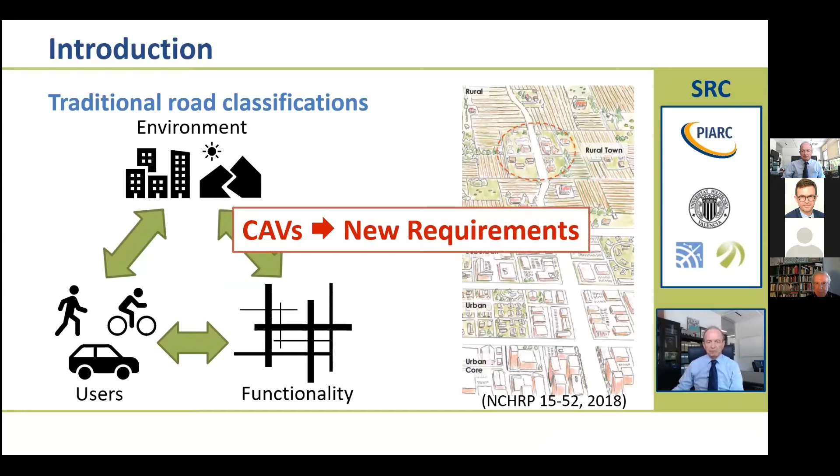However, none of the classifications proposed before 2020 took into account the incipient advent of autonomous and connected vehicles, which will of course require the definition of new criteria to classify our roads. The project, entitled Connected Roadway Classification System, developed in 2020 by the TTI at Texas A&M University in the United States, developed a new framework for a road classification system that includes the characteristics of autonomous and connected vehicles.

This road classification system establishes 4 road categories or levels, from a level 1 in red, associated with a road design or maintenance that does not meet current criteria, to level 4 in green, which is related to a design that supports the operation of most autonomous and connected vehicles and communicates with vehicles. It is noteworthy that they set a time horizon of 10 years to reach the maximum level.

To assess the level of automation enabled by a road, 3 domains were considered. First of all, talking or communication, associated with connectivity between vehicles and infrastructure; seeing or perception, associated with the recognition of road markings and signs by autonomous and connected vehicles; and finally, simplifying, associated with the degree to which mainly the geometric design and pavement conditions facilitate the operation of these vehicles.

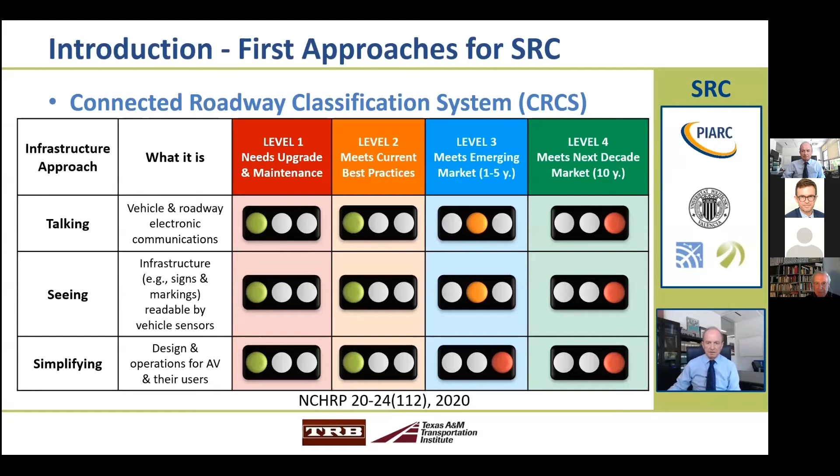However, some issues included in the classification are still unknown, as it is shown by traffic lights. Further research is needed to establish more clearly some of the criteria on which this classification is based. The main goal of the InfraMix project, funded by the European program H2020, was to prepare the road infrastructure to accommodate the introduction of connected autonomous vehicles from the perspective of connectivity.

Thus, depending on the compliance of the different characteristics shown in this table, a total of 5 categories of roads or ISAD levels were defined based on the infrastructure support levels for automated driving. As you can see on the right, different levels are assigned to road sections or elements, not to a whole road. Thus, level E is the lowest level, and it represents a conventional infrastructure which does not offer any support

for connected vehicles. At present, there would be many sections with a level D, consisting of a support of digital maps with static information of signs. Level C would complement the previous one by adding variable information such as incident warning, meteorology, among others.

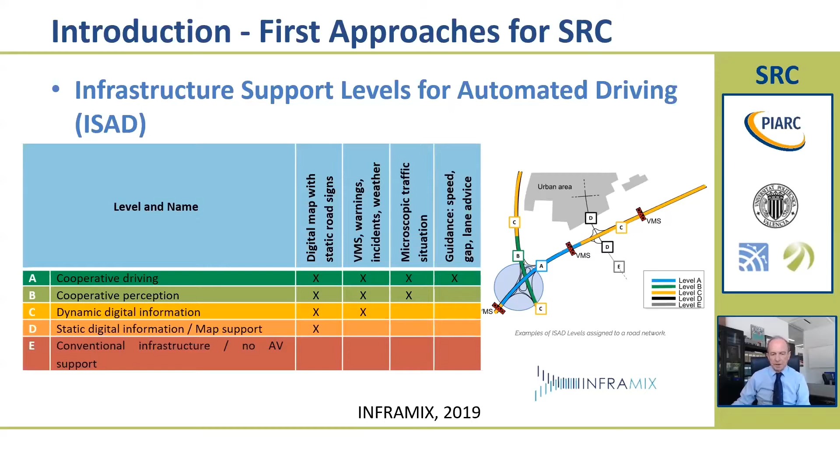In level B, the infrastructure is also able to exchange microscopic traffic and road condition information with vehicles in what is called cooperative perception. Finally, level A will allow cooperative driving to improve road safety and operation.

As a summary of the classification systems, we can say that all the previous ones did not contemplate logically the new vehicles. The new USA proposal did not contemplate the diverse users and did not include many of the factors involved in the new phenomenon without considering possible thresholds.

The ISAD proposal focused exclusively on connectivity and the necessary digital infrastructure to support it, but it did not go into the characteristics of the physical infrastructure nor into the diversity and limitations of automation. Additionally, none of the previous systems integrate dynamic road conditions. Definitely, the proposed road classification systems integrating connected autonomous vehicle characteristics are based on diverse approaches and harmonization is needed.

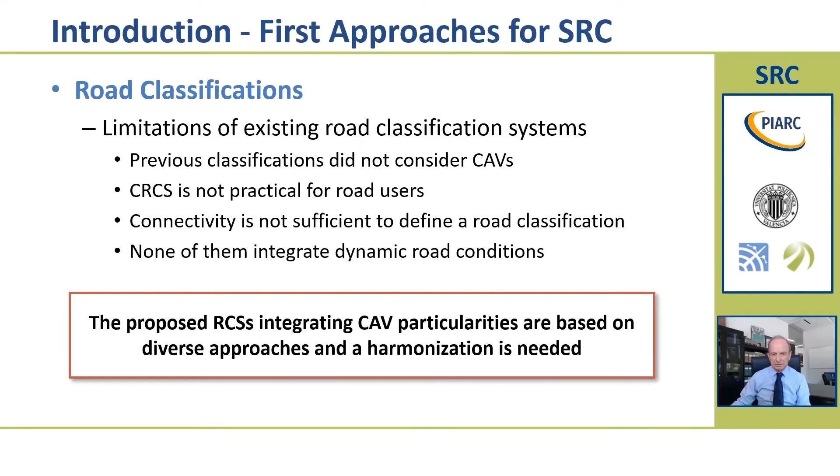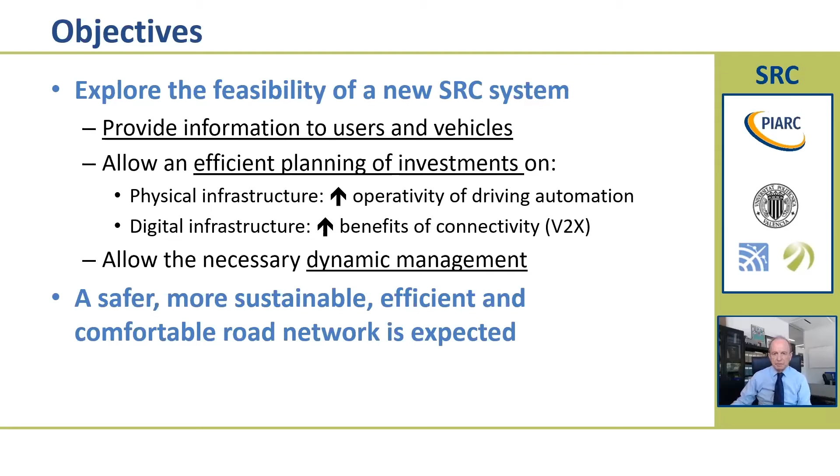The main objective of this special project is to explore the feasibility of a new smart roads classification system that could provide information to users and vehicles about the smart road level, being the base for efficient road planning of investment on physical infrastructure and digital infrastructure to improve the operativity of automated driving and the benefits of connectivity. Finally, allow the necessary dynamic management considering diverse variable factors. A safer, more sustainable, efficient, and comfortable road network is expected.

Other objectives are related to design and propose a framework that can evolve and be detailed in the future, taking into account the new and improved technology, the research findings, and the best practices of its application. Additionally, the new system should be based on the different automation levels, the necessary connectivity, the current road network characteristics and classification, and the diverse users.

Some specific objectives have been proposed for the smart road classification. There should be a common language to facilitate all stakeholder communication, useful to facilitate the application by road administrations and operators for planning, investment, and management, standardized to be included in a normative framework, interoperable to facilitate data exchange, robust to assign an adequate and coherent smart level, consistent and simple to facilitate messages for users, and it should be integral, dynamic, and flexible to facilitate evolution and transition. Finally, the new system should not mean liability for road administrations and road operators.

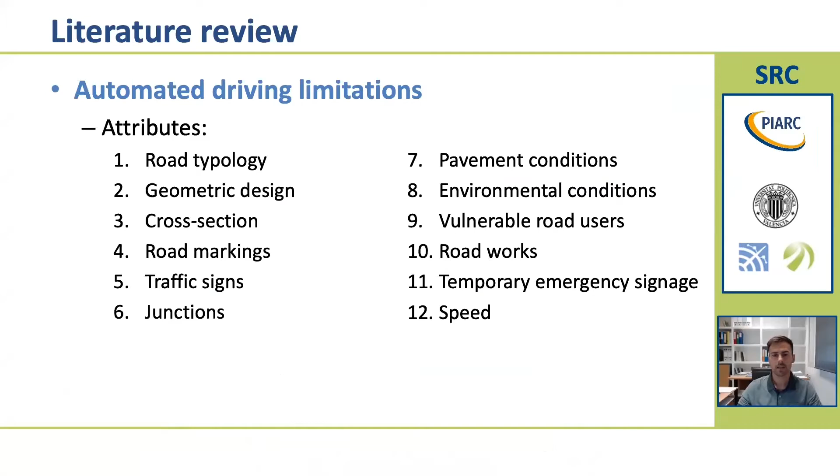Hello, my name is David Llopis, and I am an assistant professor at the Universitat Politècnica de València. In this presentation, Jose Montserrat, who is a professor at the UPV, and I are going to present the most important aspects regarding current automated driving and connectivity limitations. Particularly, a total of 12 attributes have been differentiated concerning automated driving limitations. Each attribute is introduced and discussed in the next slides.

Regarding road typology, the capacity of a road infrastructure will change with CAV penetration, and some studies indicate an increase in capacity of about 40% and 80% in cities and highways, respectively. Likewise, high-capacity roads are already ready to integrate CAVs, where some new designs, such as dedicated lanes, are being developed to ease CAV integration and performance.

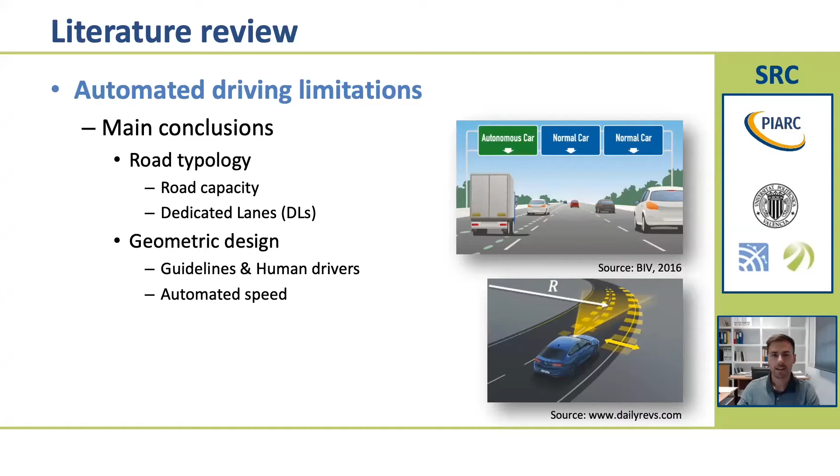It's known that current road geometric design guidelines were developed for human driving. This makes CAV operation on demanding road elements, such as sharp horizontal and vertical curves, more difficult. In addition, there is an important difference in visibility, as the point of view of the human driver is different from that of the sensors. An important new speed concept was defined in this regard, the automated speed. That is the maximum speed that an automated vehicle can reach at a specific road element.

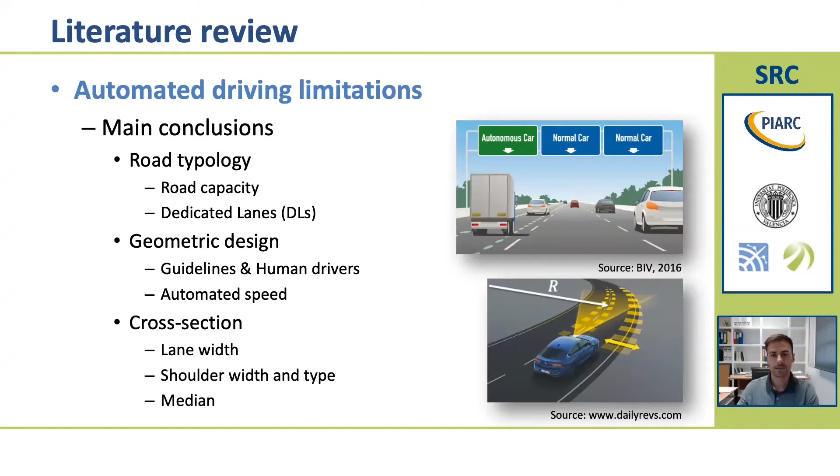Related to this, lane width, shoulder width and type, and median configuration also influence CAV performance. Lane detection and tracking, as well as identification and recognition of road markings on the pavement, play an important role in driver assistance systems, vehicle guidance, and route planning. The most important factors affecting it are contrast, geometry, pavement type, environmental conditions, and obviously its maintenance. Specifically, a 3:1 contrast ratio between road marking and pavement, widths of 150 mm, and asphalt pavements facilitate lane detection.

Most traffic sign recognition systems recognize only a few types of traffic signs, the most important ones being those related to speed limits and priority of way. Some problems during detection can arise in case of transverse distances longer than 10 meters, orientations greater than 45 degrees, or when multiple signs are present.

Connected vehicle technology could significantly improve the operation and safety of traffic at signalized intersections, thanks to vehicle communications. However, CAVs currently have difficulties recognizing traffic lights under special light conditions. For instance, at night time, yellow and red lighting colors could be recognized as the same color when processing the image.

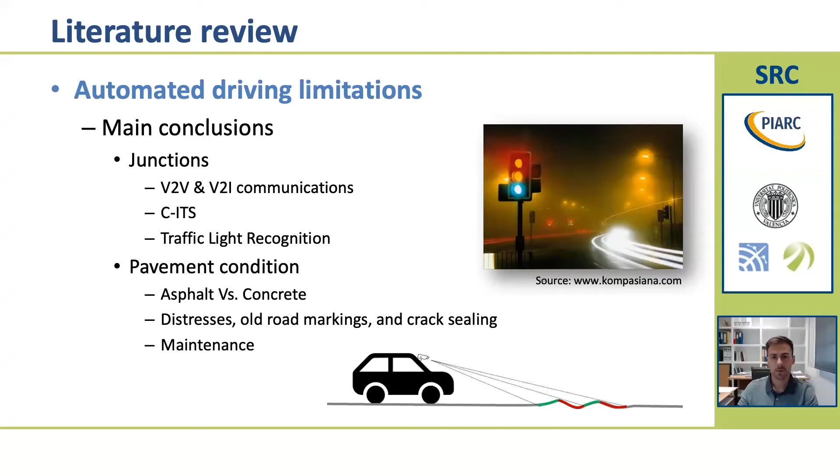Moreover, asphalt pavements provide a better CAVs performance than concrete pavement, as the first ones ease the contrast between road markings and pavement. It's clear that CAVs require a good pavement condition. Road distresses, old road markings, and crack sealing might lead to system disengagement.

As CAVs operation depends mainly on vision cameras and radars, unfavorable weather conditions, poor light conditions, and sun glare make CAVs automation harder. Regarding vulnerable road users, it should be noted that their behavior is unpredictable. This means that very complex algorithms must be developed to ensure a proper road safety level. In addition, their dimensions make object detection more complicated.

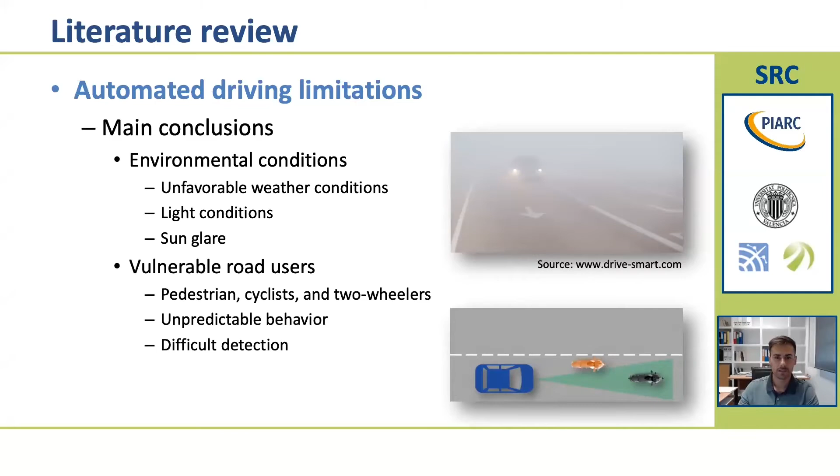The identification and interpretation of roadworks and temporary emergency signage are not possible right now because of their particularities. They coexist with conventional or regular signage, and their location usually hinders their detection.

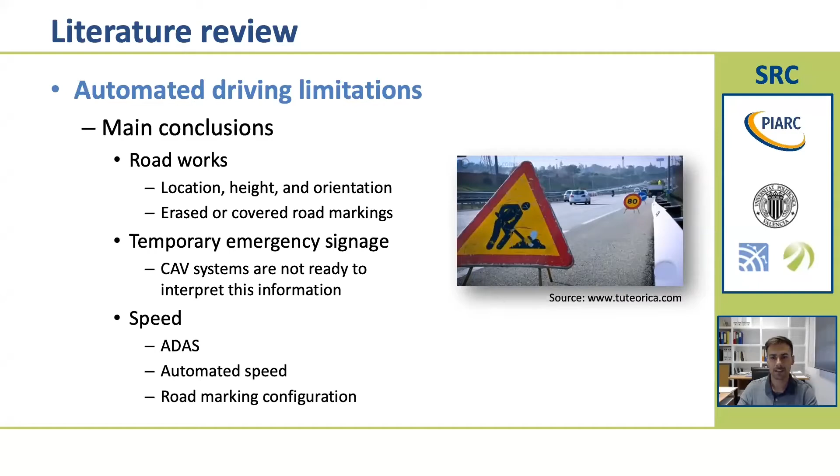Finally, it's important to remark that the speed is a critical factor in CAVs performance. Advanced driver assistance systems are usually limited to a specific range of speeds, and road marking recognition might become very difficult at high speeds, as the system has to process the gathered information faster.

With respect to the connectivity limitations, we have two different technologies available for the connectivity in our roads. The first one is to use the cellular technologies we have today, like mobile communication systems like LTE, 5G, and so on. And the second option is to move to the Wi-Fi area to use these local broadcasting technologies that are available.

With respect to the first option, what we call the cellular V2X, we have some pros here to consider. First is that eCall is mandatory in the European Union by 2018, and similarly happens in the United States. It's quite common to have full coverage in our roads thanks to the mobile network operators. And also we have two releases of two different technologies available.

The first one is the standard LTE, applicable to the cellular V2X communication, release 14. And also recently, just 1 year ago, we have also the version of release 16, which is applicable to the 5G technologies. This market, the cellular V2X, is already into production, and we have several chips that can allow us to connect our vehicles with these technologies.

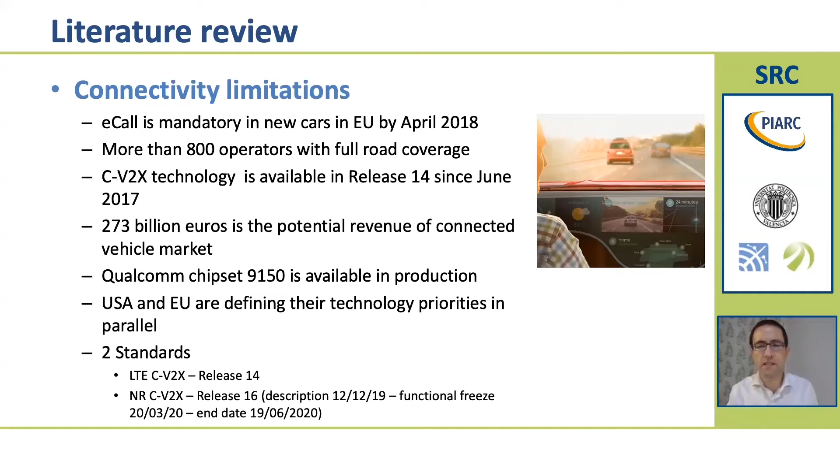As I said, the second option is to go to dedicated short-range communication. We have some pros also, for instance, related to the cost and also to the market adoption of this technology, but it has also some cons limited to the range and also how much they can scale up with the traffic. With many vehicles, these kind of technologies based on the evolution of Wi-Fi are not behaving quite well.

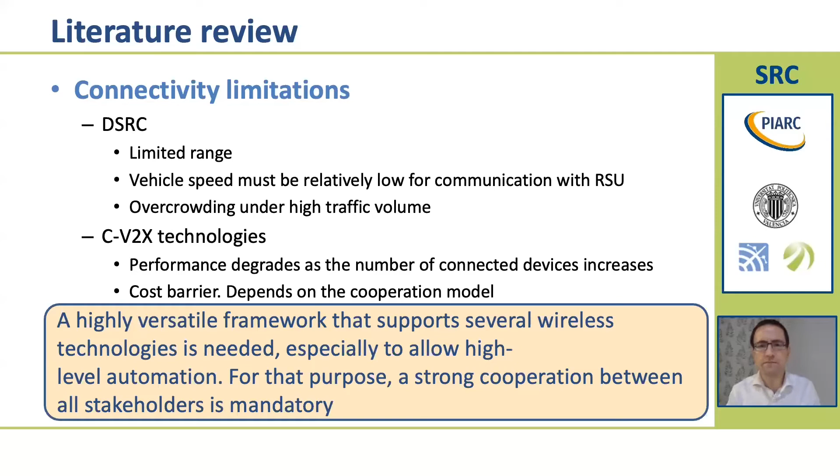So the final conclusion here is that it should be better to go to a versatile framework supporting several wireless technologies, because this comparison will allow all the stakeholders to feel comfortable and to go into the communication of our vehicles sooner. Thank you very much for your attention and interest.

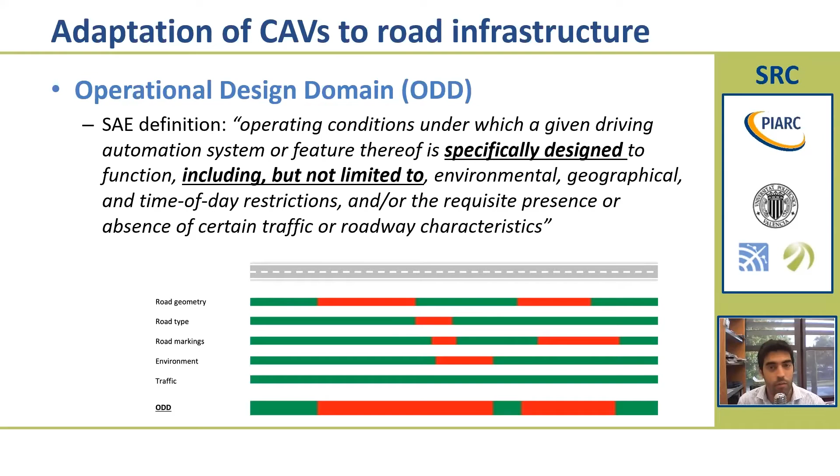It's important to see that the ODD is a definition from the vehicle side, from the driving automation system side. It means one system or another for different vehicles may present different ODDs, so the sections of the road that meet the ODDs may be different for all vehicles.

After seeing the importance of the ODD definition, we have to refer to its usability. To have a usable, practical definition of ODD, we should have a comprehensive list of all different factors that could influence or be part of this ODD. For instance, geometry related to the horizontal curve radius, the presence of spirals, the crest vertical curve, the environment, and many other things that influence how a driving automation system works or may prevent it from working. Having a very comprehensive list is a very complex task that is still starting to be developed.

Here we have 3 examples of taxonomies. The taxonomy provided by the British Standards Institution is the example you can see in the figure. There is another one from the European ITS platform and another one from the Society of Automotive Engineers.

Having this comprehensive list in the future will be very valuable, so that drivers, car makers or vehicle manufacturers could explicit the conditions for the driving automation system. This list could be compared to the road geometry or road conditions, so we might be able to know where and when the driving automation system works without disengagements.

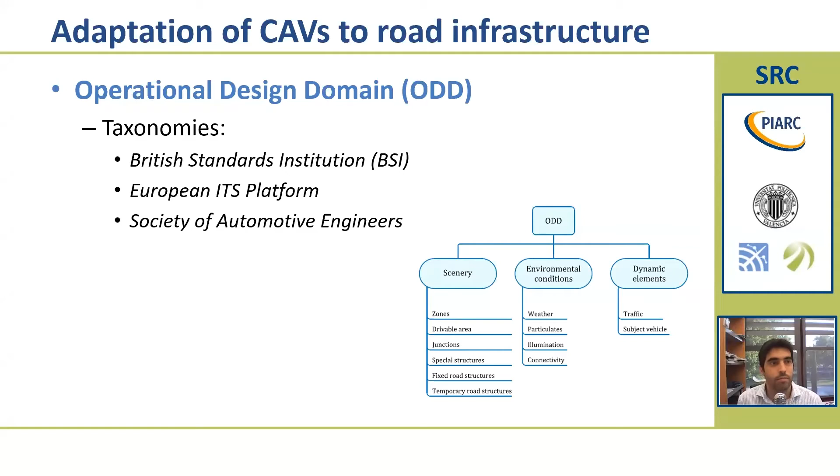Now we are going to remember the different levels of automation introduced by the Society of Automotive Engineers. There are 6 levels, 5 of them for automated systems, and level 0 for completely human-driven vehicles. Level 1 systems are able to control lateral or longitudinal driving tasks of the vehicle. If a system is able to control both longitudinal and lateral motion of the vehicle, we refer to that as a level 2 vehicle. However, the system is not able to monitor the environment.

Level 2 vehicles may control the position of the vehicle in the lane and also the speed. However, sometimes these systems are not infallible and may disengage, and disengagement is an unexpected release of control to the driver. Therefore, the driver must be attentive to the road, the environment and the driving task. In fact, here, the driver is still the human, not the system.

For level 3, the situation changes a little bit. For level 3 vehicles, the system is able to monitor the environment in addition to controlling the driving task, and disengagements may not be sudden. In some occasions, the system may be able to foresee those disengagements and ask the driver to resume monitoring, resume attention to road monitoring, and take action.

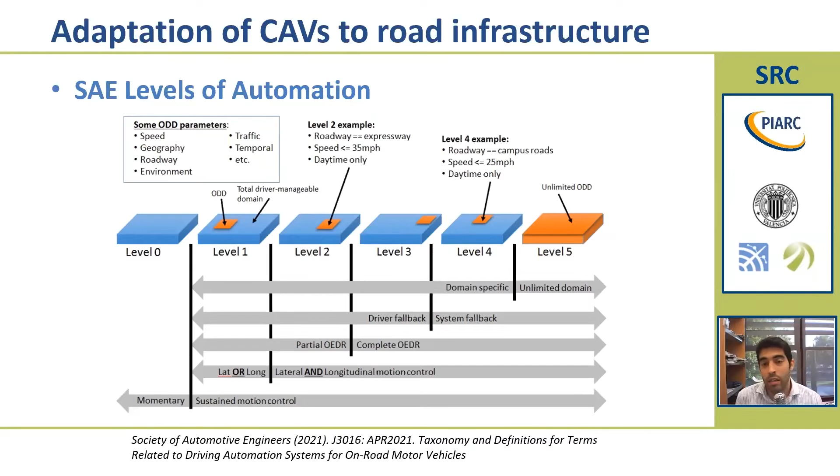Finally, we have level 5. Level 5 vehicles are driving automation systems which are completely free of any ODD restrictions. This means that a level 5 vehicle should be able to operate anywhere, with no restrictions.

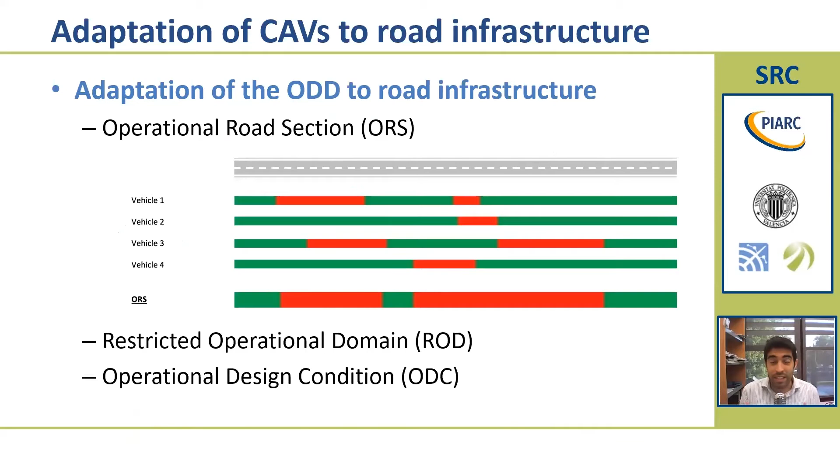Now we are going to extend the definition of ODD to the road infrastructure. As we said before, the ODD definition is from the vehicle side, meaning that one vehicle presents one specific ODD, referring to the characteristics that should be met for this driving automation system to work autonomously. These characteristics are different from the characteristics of other vehicles, and so on with all vehicles along the road.

So in the proposal we have included a new definition, the operational road section, ORS. The operational road section refers to the road characteristics that meet all existing vehicles' ODDs. To clarify that, we have here one picture that represents again one road segment, and now we have 4 different rows that show, for 4 different vehicles, the compatibility of their operational design domains. In green, we have the zones that are compatible, and in red, we have the zones that are not compatible with the road segment.

If we sum up all characteristics of all vehicles, we have the ORS at the bottom. In this section, we have in green all zones that are compatible with all vehicles' ODDs, and in red the zones that are not compatible. If we extend that to all vehicles, the green parts would be all the zones along our road network that are compatible with all vehicles.

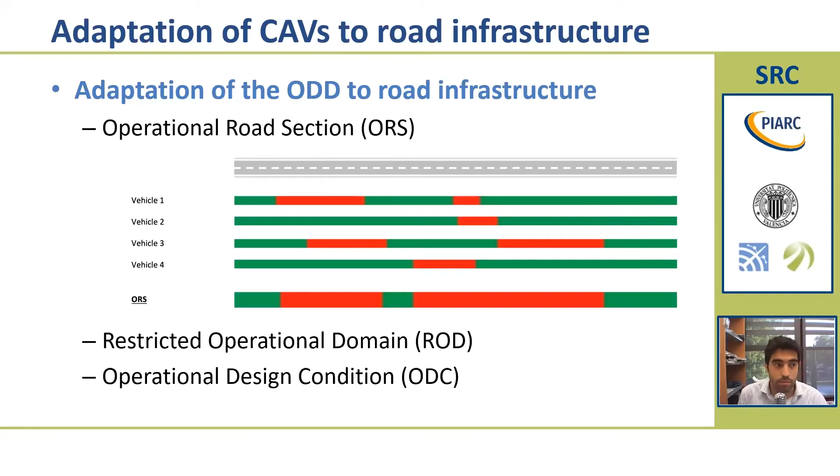It approaches the exit of the ODD compatible zone. In this case, the vehicle warns the driver to resume manual control before entering the final zone. If the driver is able to respond, then it resumes monitoring of the environment and the driving task and continues manually. But what happens if the driver is not able to respond? For instance, he's asleep. In that case, a level 4 vehicle is able to take control of the system and manage a minimum driving task in order to keep the vehicle in a safe zone.

For instance, parking at the right shoulder, left shoulder, or even keeping the vehicle in a low speed mode to reach the next intersection or interchange and keep it out of the traffic stream. The minimal risk condition is the condition that minimizes the risk for the vehicle. For instance, the left shoulder is more risky than parking on the right shoulder in most cases, so the right shoulder should be a minimal risk condition compared to the left one. Or keeping the vehicle going to the next interchange would be even less risky, depending on whether the system is able to take the vehicle safely to that part or not. We will see an example later on.

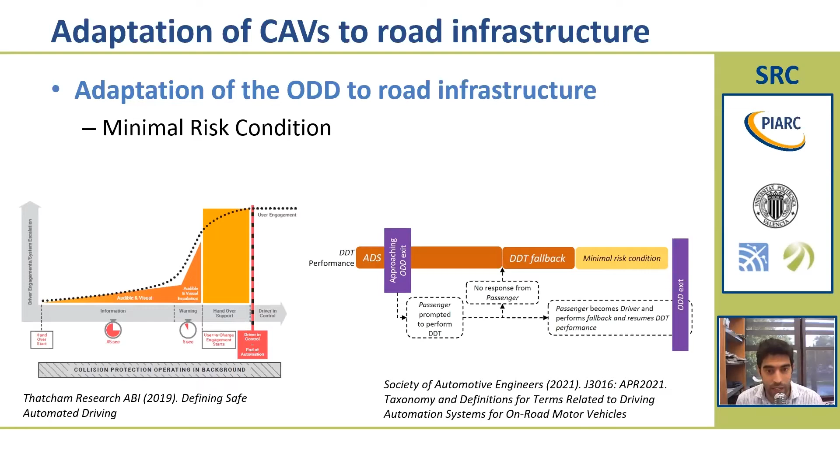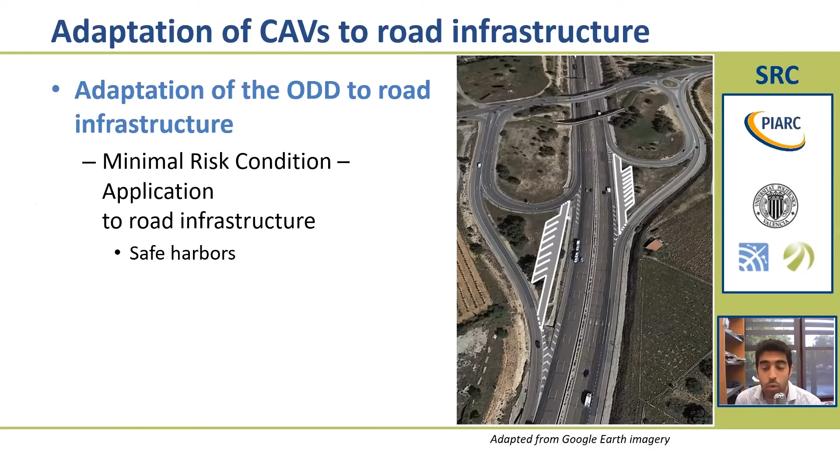Here we have one example about how to place a minimal risk condition zone for vehicles. These minimal risk condition zones are also called safe harbors. In that case, if our level 4 vehicle is very close to this interchange, instead of parking on the right shoulder, taking the vehicle to these parking lots would be safer, if possible, of course.

There is a long way until ODDs become explicit. We need a fully comprehensive list of all factors for the taxonomies. However, although nowadays it's a difficult task, we have seen some improvements, some research on this aspect.

One example is TomTom's Road Check feature. In this feature, the software is able to compare road geometry and conditions to every single specific driving automation system's ODD. Then the GPS device, using this software, suggests to the driver whether to activate or not activate the driving automation abilities. This is one example, and this is likely to become more frequent in the near future.

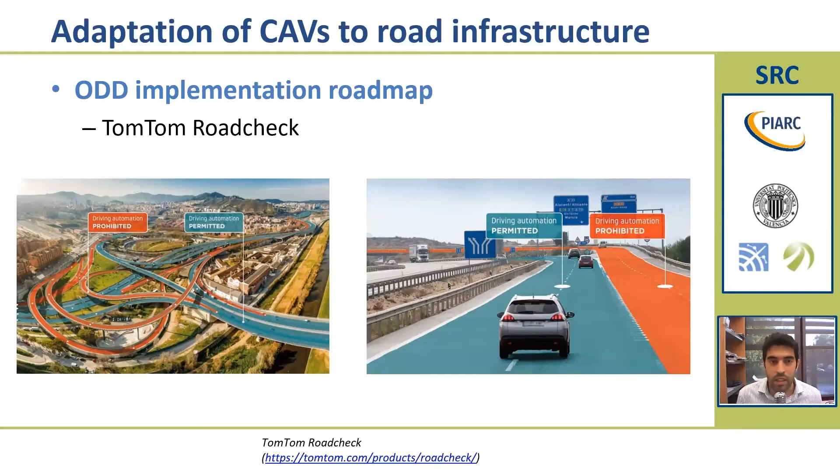Another recent contribution to the state-of-the-art of CAV performance on road infrastructure is LOSAD, the level of service for automated driving. This will be explained later in the following section, but it was introduced by the Highway Engineering Research Group and focuses on CAV performance on a certain road segment. For instance, if we have a segment with many disengagements, this level of service will be lower, and if we have a road segment with very good performance for CAVs, the level of service will be higher.

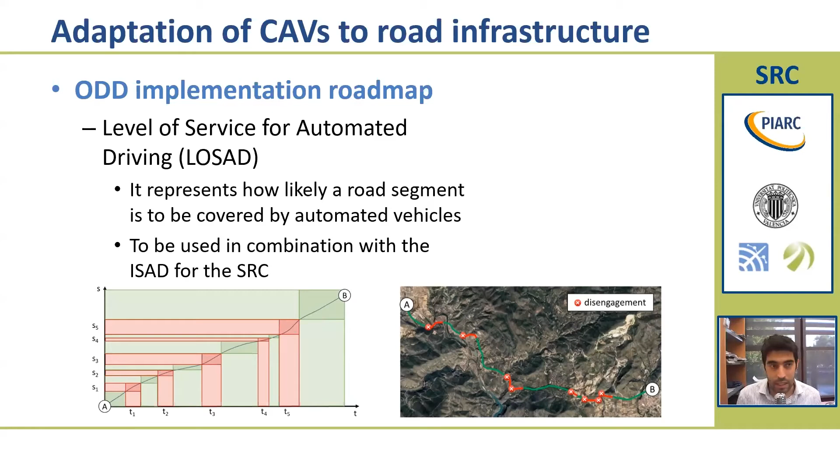I am not going to explain more on this because it will be developed later in this seminar. Thank you for your attention. Hope this has been useful for you to follow the seminar. And now we will see another video about the Smart Road Classification proposal.

In this section, I'm going to explain the main core of the Smart Road Classification proposal. The main goal is to clearly indicate how roads interact with CAVs, the acronym for Connected and Automated Vehicles. So we thought that having two explicit indicators to reflect both connectivity and automation would be a good idea.

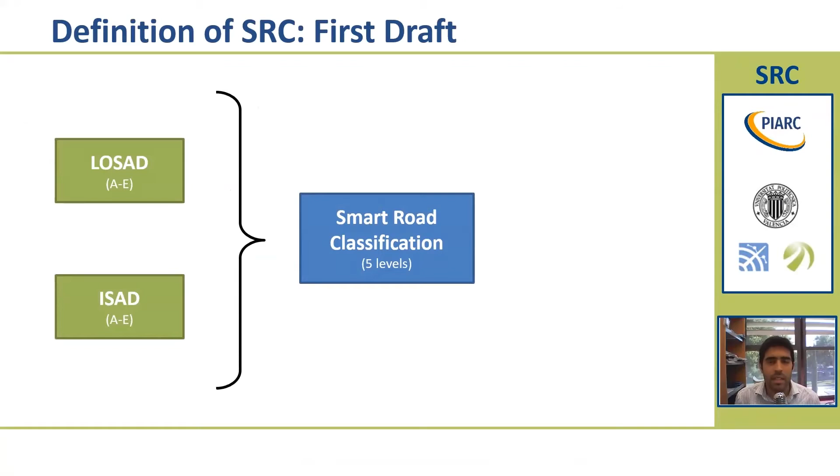These indicators are LOSAD and ISAD. On the one hand, we have LOSAD, which means Level of Service for Automated Driving. This is a new concept which indicates how favorable are the geometry, environment, and other characteristics of a road segment for automation. On the other hand, we have ISAD, which means Infrastructure Support for Automated Driving. It was first introduced by the INFRAMIX project, and it refers to how well a road infrastructure supports connectivity.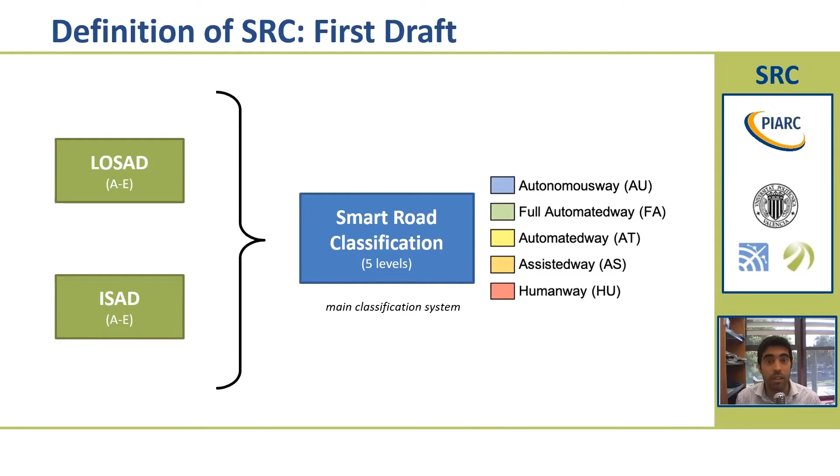So we use both indicators as an input for our smart road classification proposal. We define 5 different levels, which are, from worst to best support for CAVs: human way, assisted way, automated way, full automated way, and autonomous way. We will tell you the differences later on, but it's important for you to know that these 5 levels have no direct connection to the 5 SAE levels of vehicles.

Let's now see the differences between the LOSAD levels. LOSAD A applies to road segments that continuously support automation. In other words, the road segment is fully composed of an operational road section. Thus, level 4 vehicles would not release control to drivers, and lower automation levels for vehicles would experience very few disengagements.

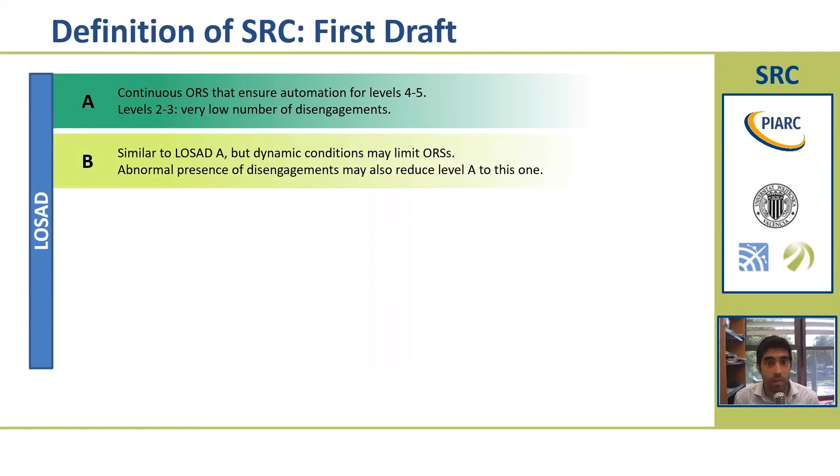LOSAD B is similar to the previous one. However, some dynamic aspects, for instance weather or disengagements, may reduce the compatibility of some driving automation systems. This could require the intervention of drivers. For instance, an abnormal density of disengagements might also reduce LOSAD A to B.

LOSAD C is different. In this case, LOSAD C does not present a continuous operational road section, so some or even many level 4 vehicles may require driver intervention. Like before, the number of disengagements for levels 2 and 3 increases too.

The same applies to level D. Level D is an extension of LOSAD C. In this case, operational road sections are shorter. This means that the number of takeover requests, disengagements, and so on will increase for most vehicles.

And finally, we have LOSAD E. As you may imagine, LOSAD E applies to road segments for which their geometry, environment, or other conditions prevent most driving automation systems from performing autonomously.

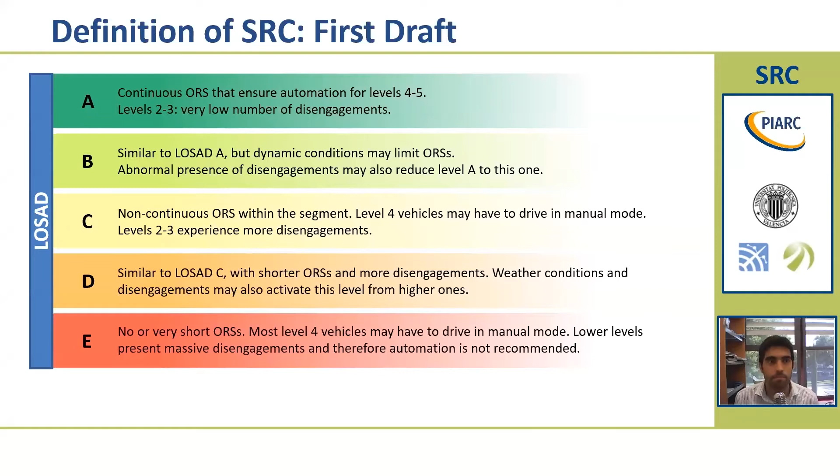Once we know the differences between the LOSAD levels, here we have a very important question: how do we apply it? Determining whether a road segment is LOSAD A, B, C, D, or E should be based on measurable factors that we know have an impact on automation. We have proposed these factors, the ones you are seeing on the screen, which we know are connected to disengagements. These factors are related to physical and digital infrastructure.

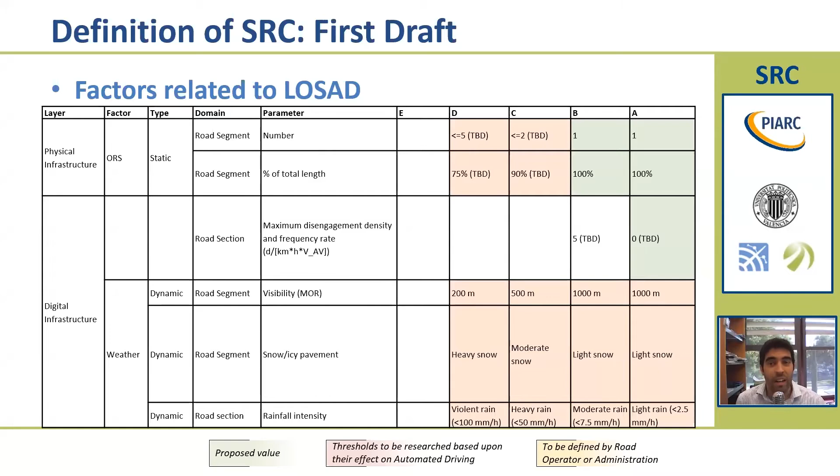In addition, we have proposed some thresholds to classify road segments depending on the different categories. However, these factors and thresholds are not important right now. With the deployment of CAVs, additional factors will be needed, and thresholds will also change to reflect more accurately their impact on automation.

Let's shift to the ISAD. As explained before, the ISAD levels represent the capacity of the road segment to support connectivity. These go from level A, which even supports cooperative driving, to level E, which represents a conventional infrastructure with no digital support. The ISAD levels were proposed by the INFRAMIX project, funded by the European Research Programme Horizon 2020.

In addition to the levels, those researchers proposed many factors and thresholds to classify road segments into the different types. Those factors are the ones you can see for the digital infrastructure. For connectivity, the scenario was quite more open since the real scenario is still not defined in a European or even a worldwide perspective. We have proposed some factors, but those thresholds will be later defined more accurately as the scenario becomes clearer.

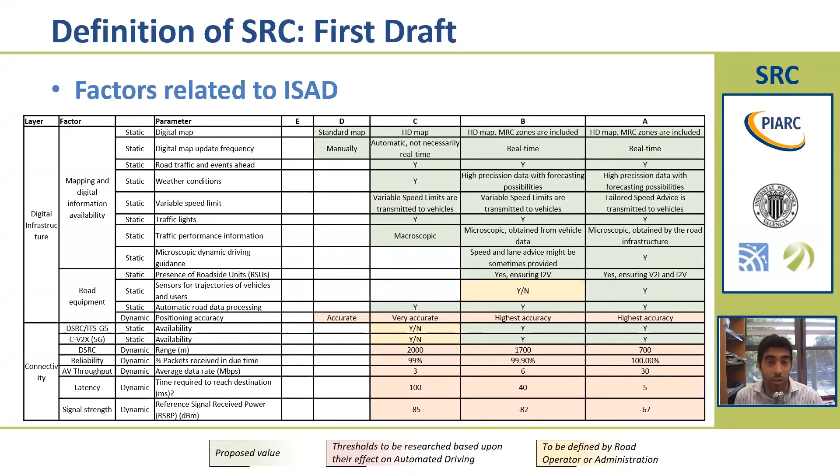Now we are going to see how the different LOSAD and ISAD levels interact to produce the 5 smart road classification levels. The first case is when we have a very poor LOSAD level, and it does not depend on connectivity. In that case, the road geometry and environment produce too many disengagements. Therefore, drivers should not, or must not, activate their automation capabilities, because they will not be able to use them appropriately along the road segment.

The next step is when we have a not-so-poor LOSAD level, again regardless of connectivity. In that case, those road segments may be able to allow one minute, two minutes of continuous automation. It also, of course, depends on the capabilities of the vehicle.

In that case, depending on the circumstances, drivers might be willing to activate their system because the infrastructure is not so poor. This situation slightly changes when we have a better automation, LOSAD A, B, or C, but we don't have connectivity support. In that case, a level 4 vehicle might be able to drive along the road segment. However, in that case, the infrastructure cannot send information about the ODD configuration, about the ODD start and sections, and so on. So the vehicle is not able to perform as best as possible. The vehicle cannot determine with sufficient time, plan with sufficient time, takeovers, and might reduce its performance.

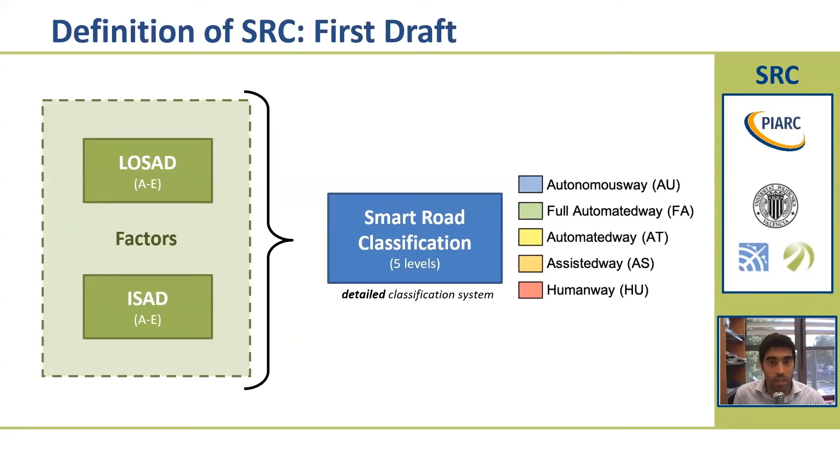We've seen how the LOSAD and ISAD can be used to determine the smart road classification level of a road segment. However, we thought that in some cases it would be more practical to determine the smart road classification of a road without previous calculation of these parameters. This can be done by directly applying the underlying LOSAD and ISAD factors. The results would be the same, but road administrations and operators would operate a little bit differently. Since all factors are made explicit, this way to proceed is called the detailed classification system. Keep in mind that the results are the same, regardless of the way to reach the smart level of a road segment.

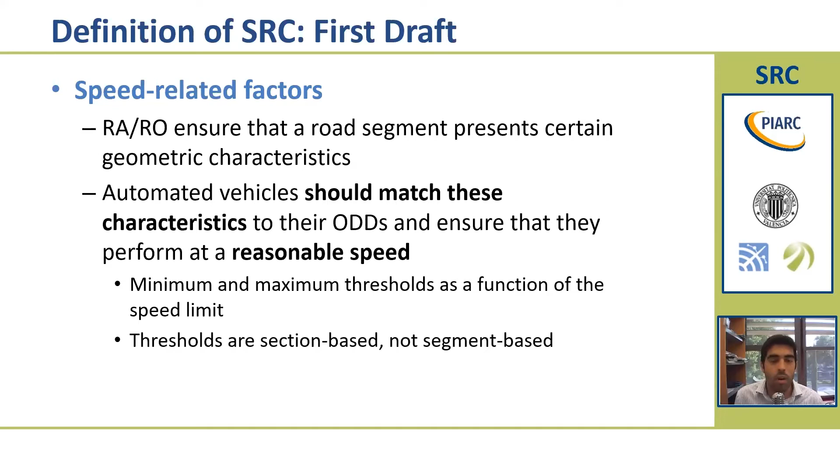These thresholds should not be a static value. These thresholds should be a variable according to the road section, for instance, according to the curve sharpness, visibility, or other aspects. We have proposed the speed range to be a function of the speed limit of every single road section, for instance, tangents or curves, but more has to be said in the future.

In that case, remember that these have a continuous operational road section. Therefore, those requisites, the radius, K, and so on, should be the ones that make sure that all level 4 vehicles can drive autonomously without intervention of the drivers. These factors, again, will be later refined once we know more about the level 4 vehicles. We also propose that these cutting-edge road segments are proposed for high-end two-lane rural roads and also freeways.

Finally, we have the best smart level, which is the autonomous way. This is an extension of the full automated way road segments. However, in this case, we have even better road geometric characteristics because they should also meet all vehicles' operational design domains. And we also have other dynamic variables, such as, for instance, rainfall intensity, that should be under control.

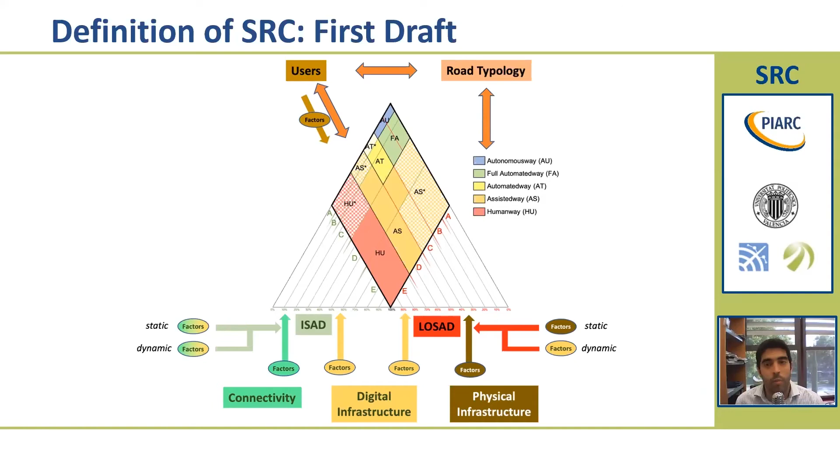Administrations and operators could apply special restrictions to users depending on the smart level of the road. The same happens with road typology. We have proposed full automated way and autonomous way segments be deployed on cutting-edge two-lane road segments and freeways, but this is a decision that could be changed or take a different approach by road administrations and operators in the future.

Thank you for your attention. Hope that you have enjoyed this introduction to the smart levels. And now we will answer your questions and give you a brief questionnaire about this classification system.

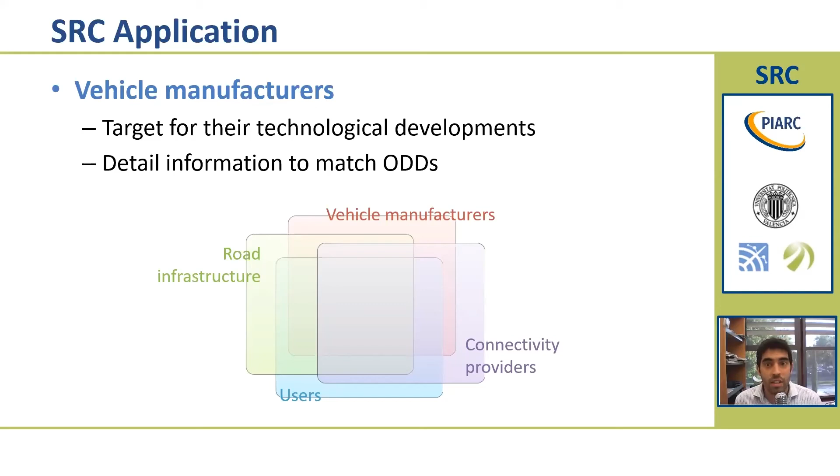In addition, by knowing the geometric thresholds for the different smart levels, vehicle manufacturers could also set clear targets to develop and test their vehicles, their driving automation system. Therefore, as you can see in the picture, road infrastructure users, connectivity providers, and vehicle manufacturers should work together, boosting their synergies and accelerating the development and deployment of CAVs.

Finally, there are other stakeholders involved in the equation too. New private and public services will appear in the future. Some of them are not even known today. Some applications could be, for instance, to foresee disengagements sooner, or information about traffic and pavement conditions could be retrieved and transmitted from the road, and also managing the road through the information provided by connected and autonomous vehicles. Many other uses might appear in the next 5 to 10 or even more years.

Finally, in the proposal, we have indicated some key performance indicators that could be used by road administrations and operators to see how well their road networks work. Here we have some examples, like the disengagement rate, the average crash rate involving CAVs, the smart road levels for the entire road network or any specific road type, and the same for ISAD and LOSAD. These KPIs in combination with traffic, safety, income, and any other aspects could be used by these agents in order to prioritize actions or to see how well their segments are performing.

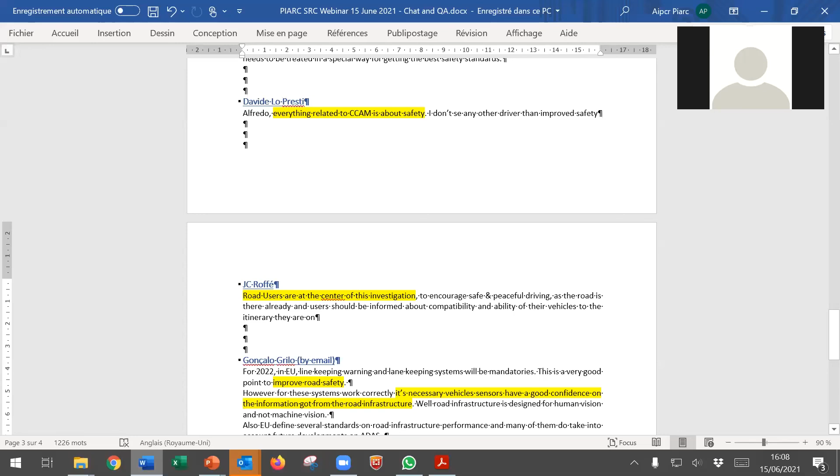Just about the user needs. There are so many needs, depending on whether you are a truck, a private driver or a bus; you have so many expectations. So my perception is that of course the ideal thing would probably be a specialized channel lane, but it will never exist anyway, except probably on very small stretches of some motorways. But the main important thing, especially regarding the different requests from the cities, from urban areas, is that the road would be shared, and that's really the main thing, to accommodate all of the needs in a common space.

So how to deal with that, I don't know, but coming back to the subject, classifying the road is very important to provide road users, whoever they are, peaceful and safe driving. So I think the classification of roads is really a key element we have to work on. Of course, as a lot of people said, we probably have to open the ecosystem to gather more cooperation from road users and from the automotive industry, because for the moment they are not really taking the road into consideration, but as JC Roffé said, the road exists already, so they would have to take that into account. Thank you very much, Patrick.